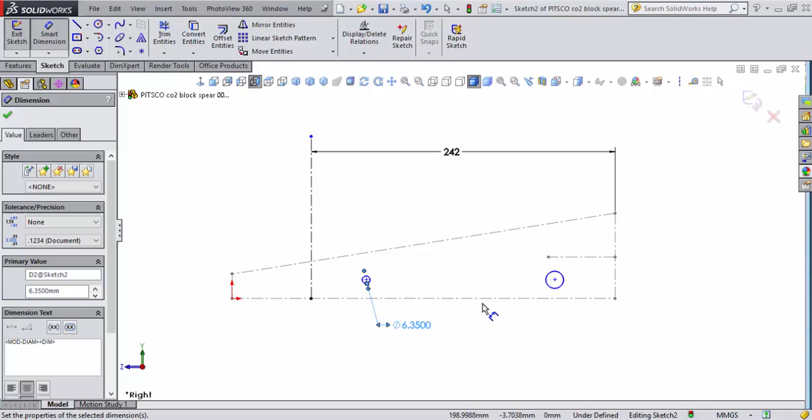So I'll draw the hole there, and come back over here and draw a hole here. Now I need to make sure that this is 6.35 millimeters, which is 1/4 of an inch, my diameter, and do the same for this hole here as well.

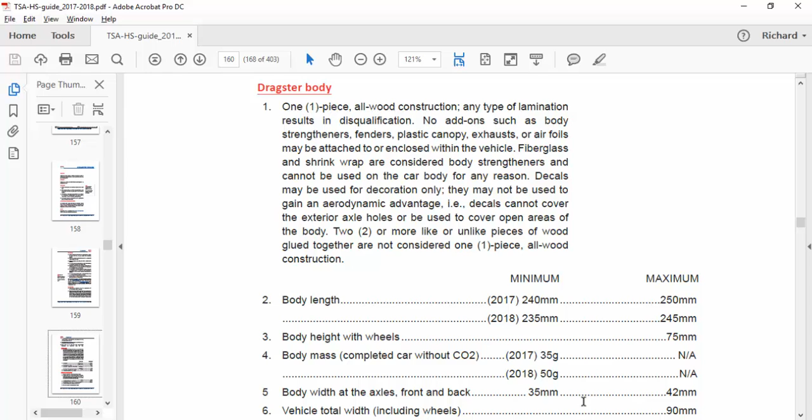Now what's important is we need to understand what is going to be the height of this hole, this opening, relative to the bottom of our car that we designed. So I'm going to go back over to the competition rules guide to find where the axle holes are specified.

It says right here, the bottom of axle hole or bearing above the bottom of the car body. Note this will be measured at both sides, at the sides of the wood car body, from the bottom of the car directly underneath the axle to the bottom of the axle hole or bearing hole.

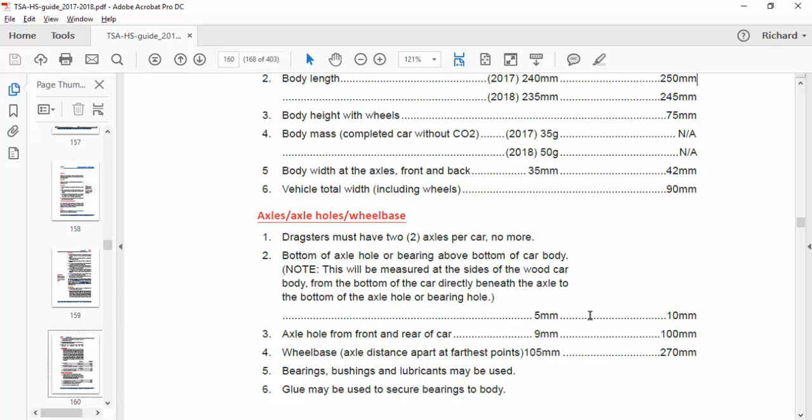So they're saying right here the minimum is 5 millimeters. The maximum is 10, and that's something you need to play with and consider relative to how low or high you want the car to the track, based on your diameter of your wheels, which is about 30 millimeters.

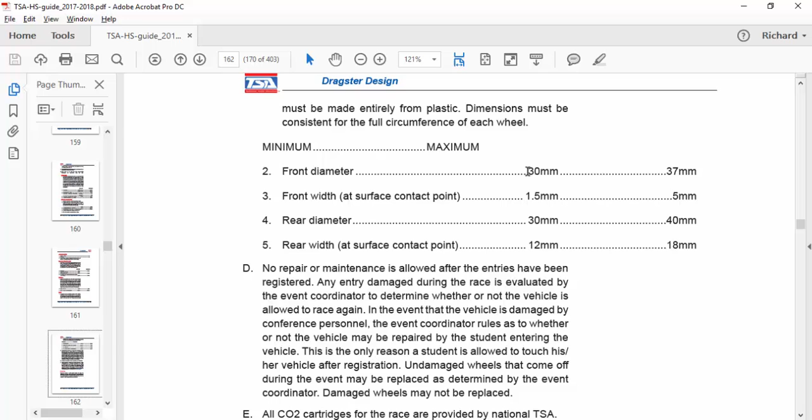So what I'm going to do now is go back to SolidWorks and just arbitrarily place a point on the bottom of that hole, the axle hole. Then I'll set a dimension from here to there, and say 7.5 millimeters. I may come back and adjust that, but for right now we're going to put it right there.

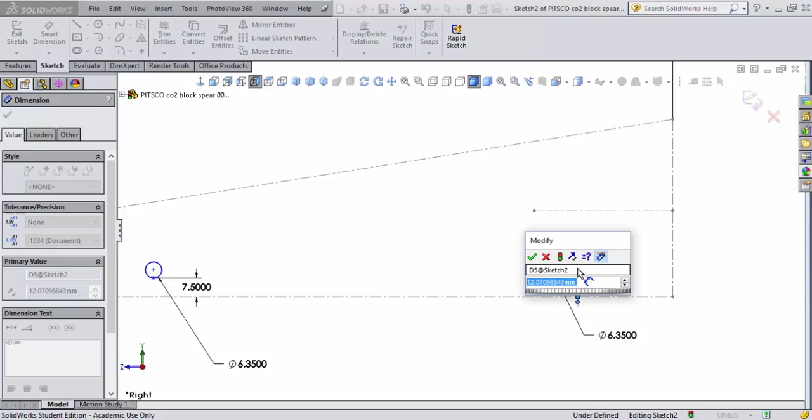Now I'll hit the F command on my keyboard to fit my drawing, and I can see both wheels' axle holes. As you can tell, this one is 7.5, this one's considerably higher. So I'll repeat the process and put that sketch at the same height, 7.5 millimeters. Okay, we're going to stop here for a moment and come back.

Okay, at this time we need to figure out what the actual wheelbase of the car is going to be. Typically it can be measured from the outside of the bearing or the outside of the axle. Well, that could be a challenge.

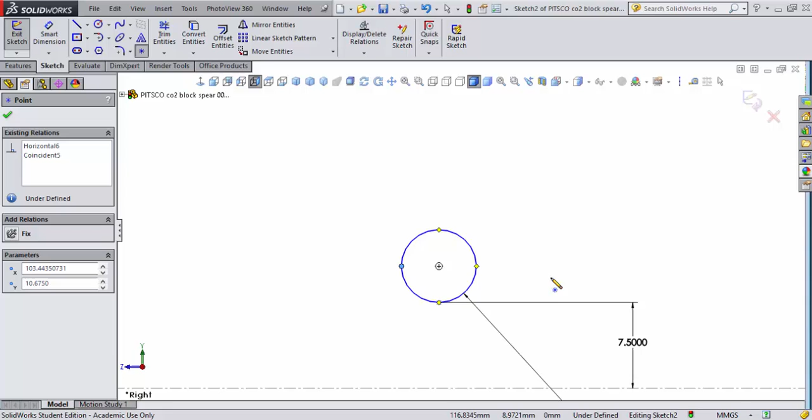So what I'm going to do right now is zoom up to this, and place a point right here on that particular wheel, on that axle hole where the bushing would go. And I'll come over here and do the same thing. So now I've got 2 points on the outer edge of that.

And now let's go back to the competition rules guide and check that specification out. Okay, axles, axle holes, and wheelbase. The wheelbase is 105. The wheelbase is the axle distance apart at the farthest points. So that's the axles, not the bushings. That's a very important thing we need to consider.

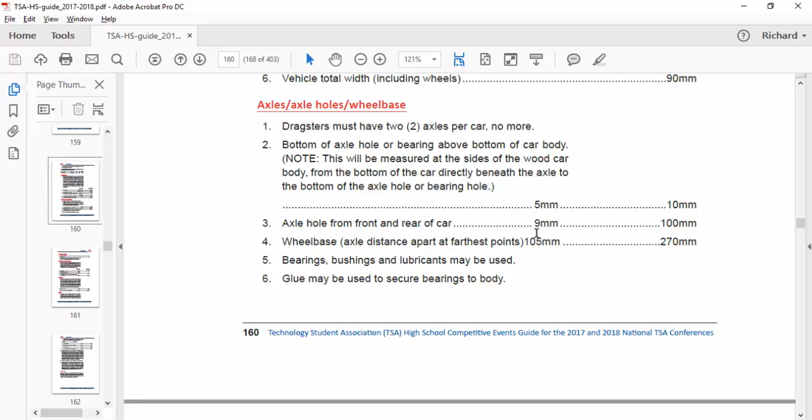So what I'm going to do now is go back to SolidWorks. I'm going to have to do a little math in my head. I'll put a dimension from here to there, and set that to 105 millimeters plus 6.35 millimeters. Remember, the diameter of the axle itself is 3.175, or 1/8 of an inch, in the front as well as in the back. So why we're doing this is we've added another 1/4 of an inch to compensate for that actual axle distance.

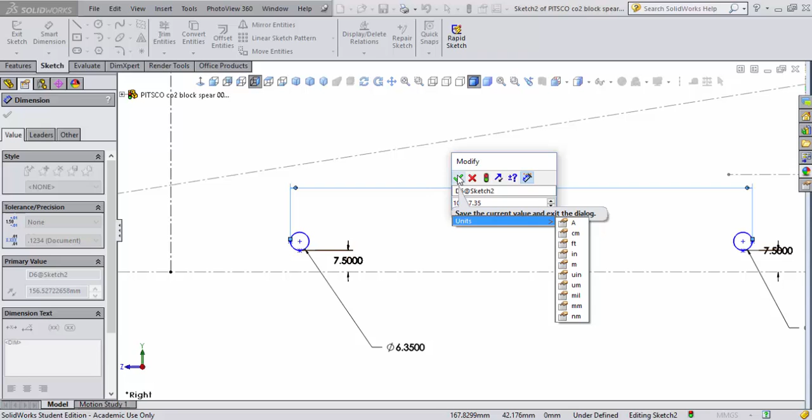So to be on the safe side, which I always want to be, I'm going to go ahead and say 7.35. So it gives me basically another millimeter so the judges can't DQ me.

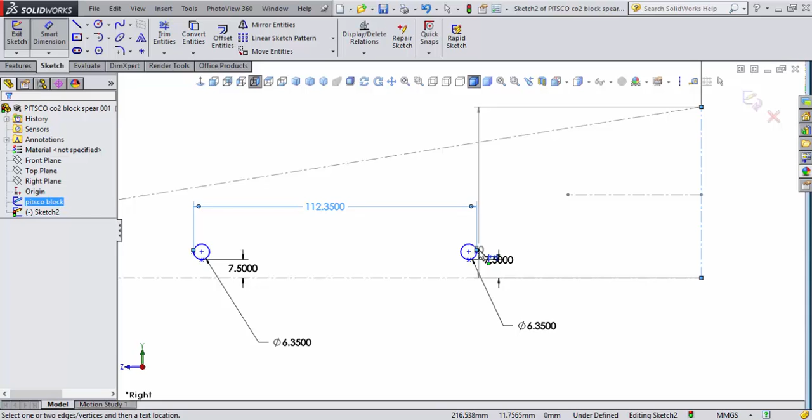Now as you look, it took and moved this all the way over there. That's not a problem, we can fix that. So I'm going to go ahead and set another dimension from right here. Let's escape that. We'll start our dimension from the edge of the block here over to this point. I'm going to set that arbitrarily to 50 and just kind of move those wheels over. I can actually adjust that even more toward the axle holes, maybe 45. So this would give me room to put my wheel in and also give me room for my eye screw that I need to put in to hold the car down to the track with the fishing line.

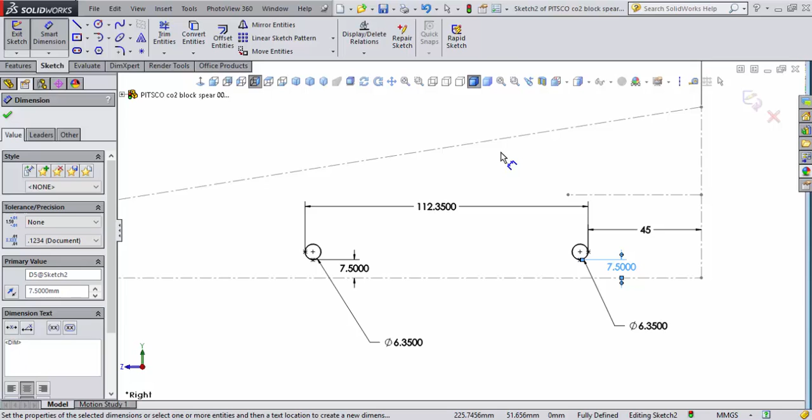Okay, we're going to come back to this. So what I want to do now is go ahead and plot some points out here. I'm going to right mouse click and go back to my selection tool. I want to plot some points up here, which would be the actual top of the car, and it would include the safety zone that we need around the CO2 chamber.

So what I'll do is place my point. Now this is at 55 millimeters here. I'm going to set a measurement. I'm going to go off this point here and the point I just placed, and key in 19 millimeters divided by 2, which would give me half of the diameter of the CO2 cartridge. So I key in enter, so it's 9.5.

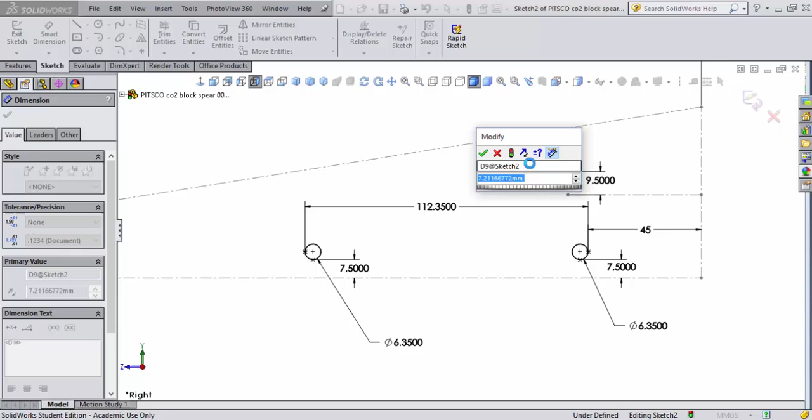Now what I'm going to do is come up here and place a point above that right here, and set that dimension to 4 millimeters. So I'll use my smart dimension, and I'll come in here and select this point and this point, and go to the right of that, and say probably 4.5 millimeters.

Okay, so now what I'll do is come back here to the back of the car, and set a dimension, set a point right there, then come up and place another point above that right here. I'll make sure it's not collinear with the point I just placed, so I'll place it a little bit above that. Now I'll go back to my selection arrow, and click on this point here.

I'm going to right mouse click and go down here and see if I have another command. I don't have that command I'm looking for, so that's alright. We'll go ahead and set some dimensions anyway.

So I'm going to go from this point here to that point, and set a dimension of 3.5 millimeters, as you see there. Now from this point here to... oh wait a minute, I did that wrong. Let's go and change that.

So I'll double click on this, and it has to be the same diameter as the actual CO2 opening. Maybe a little complex, but that's okay. We're actually engineering a car here.

Now that's better. So let's go back and smart dimension this from here to there on that one point. And at that point I'm going to key in 3.5 millimeters. What I'm doing is setting plot points for my car to go from one side of the car to the next. Now the next thing I'm going to do is zoom out a little bit.

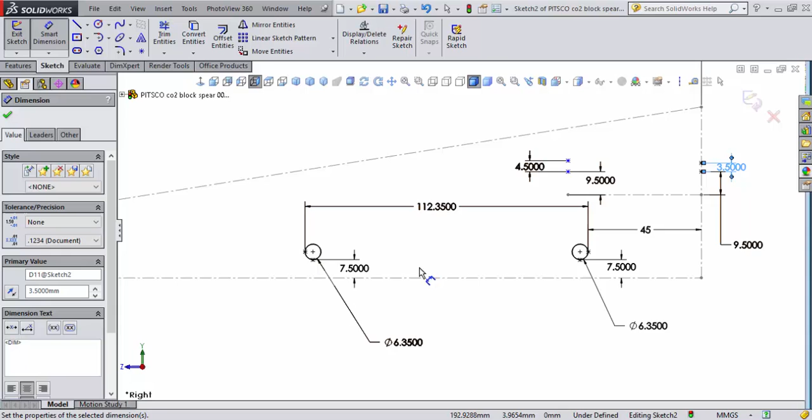I'm going to come over here, right mouse click, and get my selection. What's important here is I'm going to go directly off of this point. If I can't find it, I'll put in a line from horizontal, and I'll start from this point and go over to here.

Now I'm plotting a point in right there at this intersection, where that will be the front tip of my car. The reason I have a long distance from this point here to the front of the car is that this is going to be a 35-gram car.

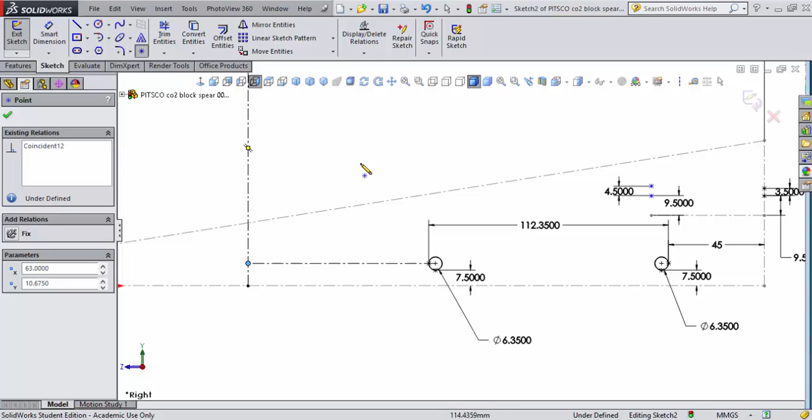It's a very light car. This car, to win a championship, will have to race a minimum of 8, maximum of 9 races. So think of this thing in the front of the car hitting the towel going 55 to 60 miles an hour, anywhere from 8 to 9 times. So we want as much protection in the front of this car as possible to give it more durability in the long term of a race.

What's important to understand is what I just accomplished. I went in and put these points in. These will become anchor points for the spline that I put onto the car. That's important because it allows me to control the shape of the car and the profile as we design it.

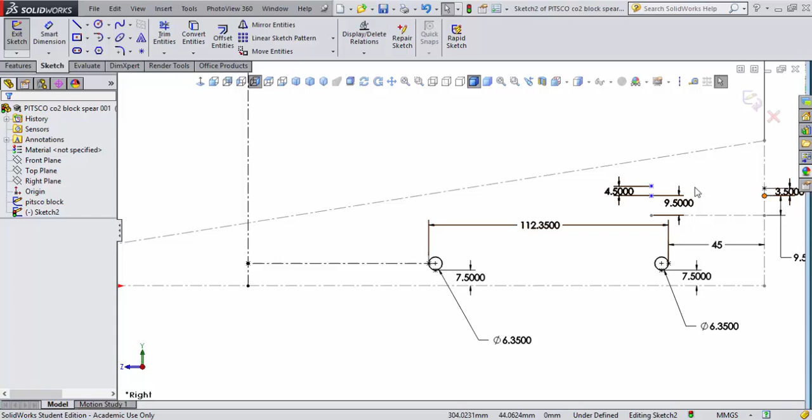So what I'm going to do now is select the spline command, and come over here and start plotting these points in. I'm plotting that point in there, and I'm going to plot this here and plot that right there. So I'll go ahead and escape on that.

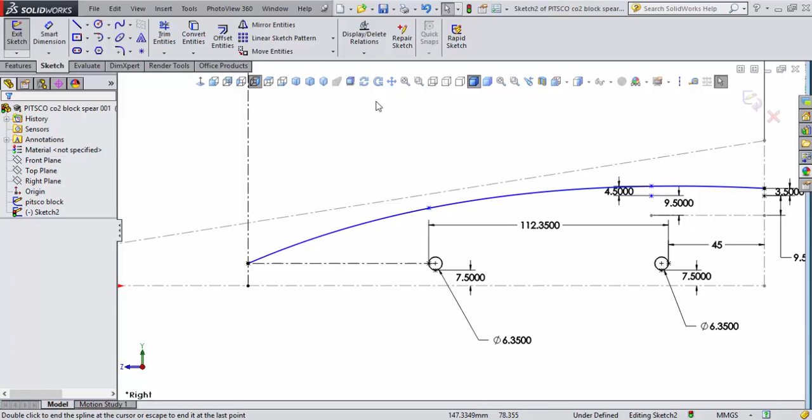I'm going to go back and put a line in going from here down to the base of the car. I'll come over here to about the center. I wanted to make sure I got it basically right underneath the bottom of the axle, and as you can tell, I actually did not do that. That's not a problem, so at this point I'll use my power trim command and just take that line out.

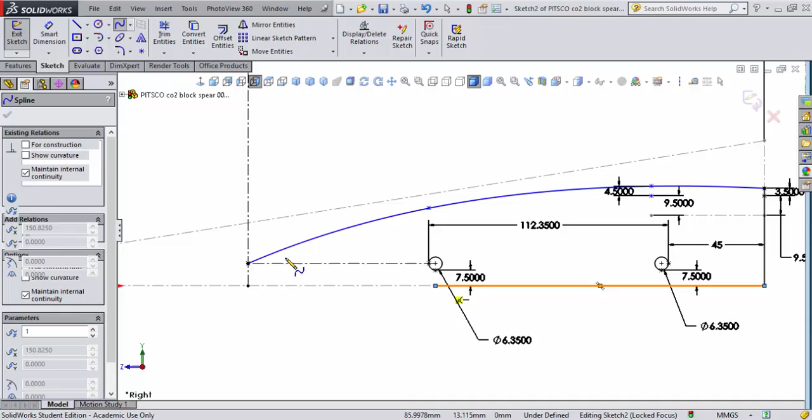I'll hit my line command again, and come up off that particular point we put in at the bottom of the bushing/axle hole. I'll draw the line over to there. Now instead of exiting the command, I'll select the spline command again and put a point right there. At that point I'll hit escape, and then I can select this point and adjust down the actual profile I'm looking at.

Now I want to express a couple of comments about this that are important. The shape of this overall profile matches the Bernoulli effect on an actual wing. I want to create lift on my car and not have it forcing itself down, which is why I put this little lip on the underside of it so I actually get a little lift. My goal is to try to create a wing that's flying down the track as efficiently as possible.

Okay, we're going to stop now at this point, and we'll come back and start working on the extrude portion of this. Now at this point I've got a really nice sketch, so what I want to do is extrude this sketch into a 3D shape that can be the center of my actual car.

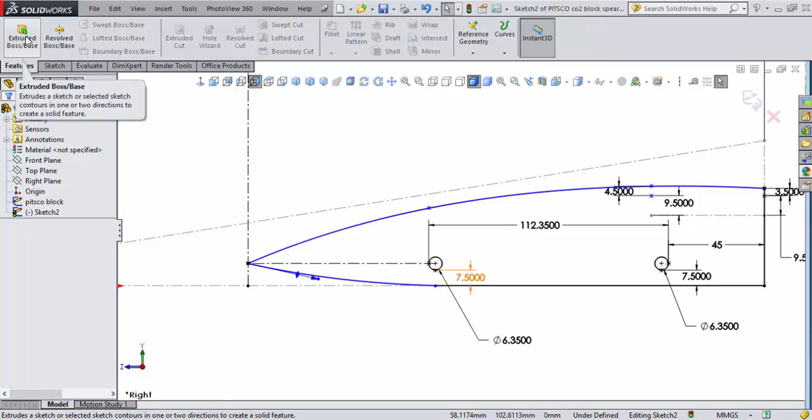So while still in the sketch, I'm going to hit project features, and go to extrude boss base. Now the car comes around, and what's really important is this: we do not want to extrude from the sketch outward, we want to extrude from the mid plane of the sketch. We're going to leave it at 10 millimeters, and hit accept on that.

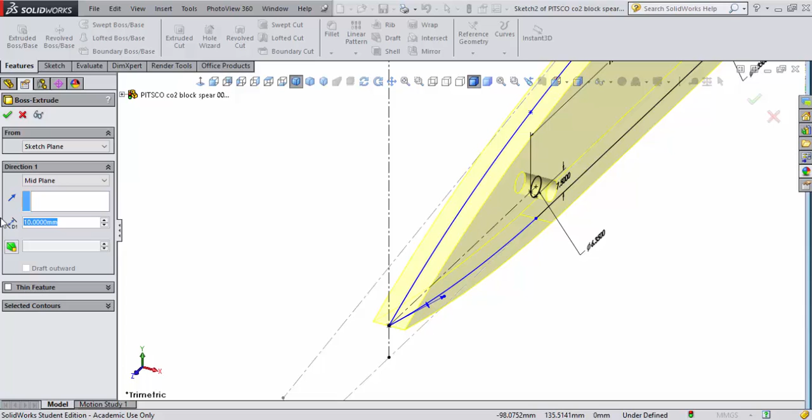So now if I do an F, which fits my sketch, and control 3, it should show me the left side, and control 4 shows the right side of what my car is starting to look like. I've got a lot of liberty here to modify and change things, which is really cool. Maybe I want to pull this point down a little bit, but actually I'm more inclined to leave it there, so that gives me my actual sketch.

Let's go ahead and do a rebuild and save our model. Okay, that looks pretty good for now, so we're going to stop here, and we'll come back and draw in our CO2 chamber.